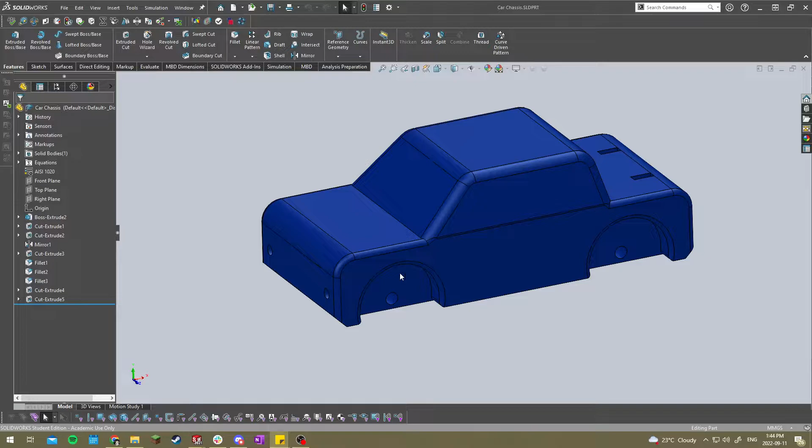In this case, we'll be assembling a toy model car. We have 5 different components here, and I'll show you how to mate each component and put it all together in an assembly. So right here we have the car chassis.

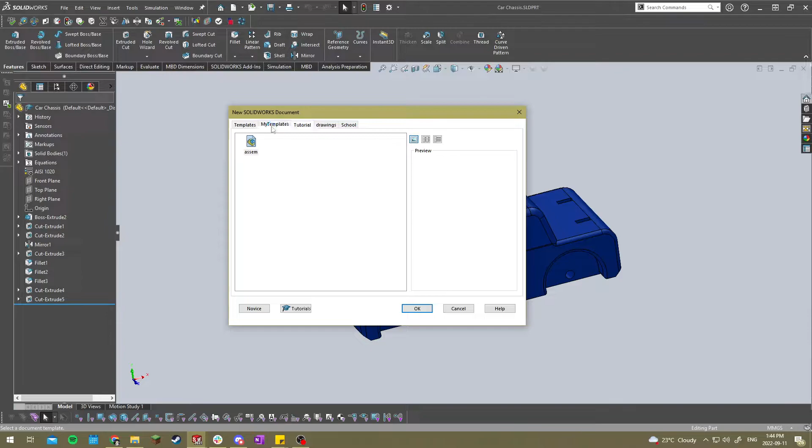If we want to start an assembly, we could go here, click on the drop down, and choose Make Assembly from Part. Click on that, and you have to choose your assembly template. In this case, I have my own that I made, so I'll choose that. And it will let you import the car, or at least the first part.

The other way of doing it is by clicking this New Document button, clicking on the assembly template, and it would repeat that same process. You would go here to browse for whatever file you have, or if it's already open, it would be shown on the left here. So you could do the exact same thing here.

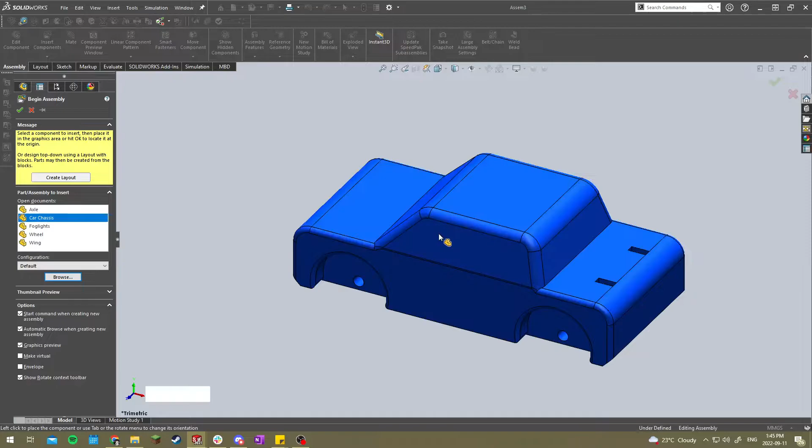When you first import your part, the first part that's imported will usually be fixed. To remove that, you would right click the part, click on Float, and it lets you move it. In this case, this part here, I want to fix it to the origin.

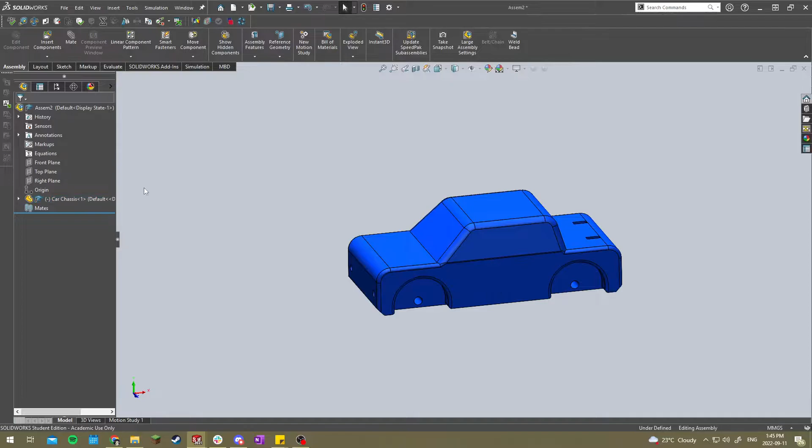So the first thing I could do is mate the planes of the assembly to the planes of the actual part. In SolidWorks, and with most CAD softwares, when you're mating an object you usually need to mate it into 3 different planes, or at least 3 times, to fully fix the item. So I'll show you why now.

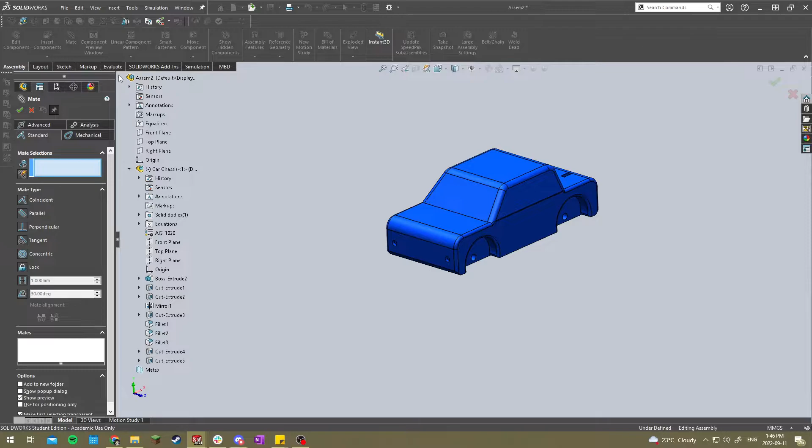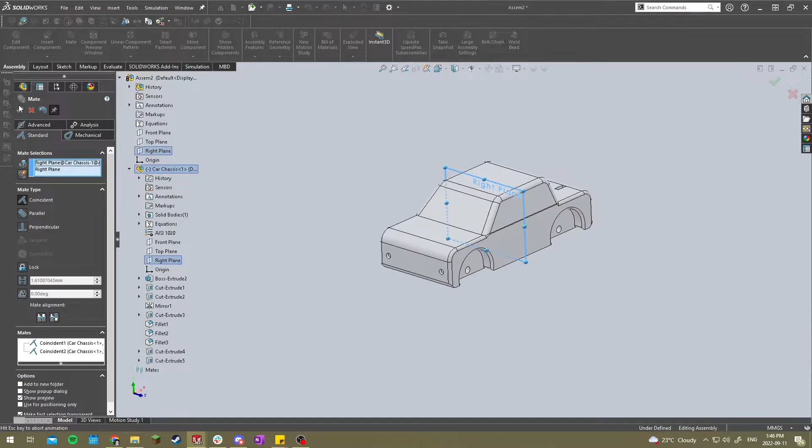If I first mate the 2 front planes, hit the mate tool here, open up your feature tree, click front plane of the part, front plane of the assembly, and mate it. You'll see I could still move the car. If I mate it a second time, top plane with top plane, I still have one other motion of translation. So if you do it a third time, it will just fix it in the 3 planes and you won't be able to move it.

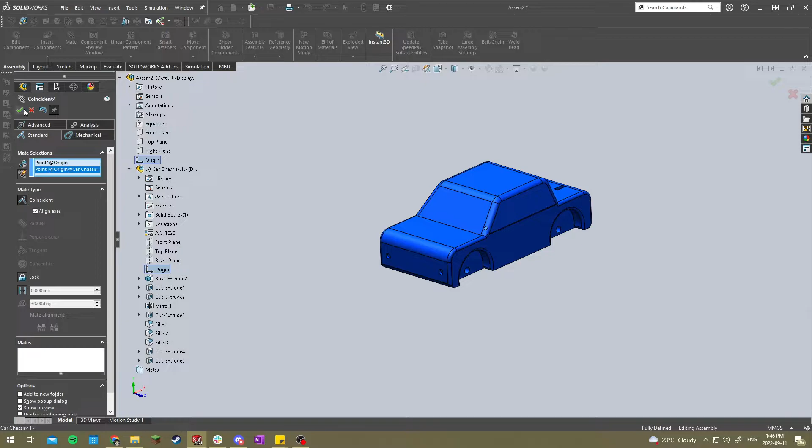There is a faster way of doing this though - I could also just mate the origins together. So if I delete all of these, click mate, click on the origin and this origin, it's going to mate it to the origin and work the exact same way. Once we have the main part mated to the assembly, you can start adding the rest of the components.

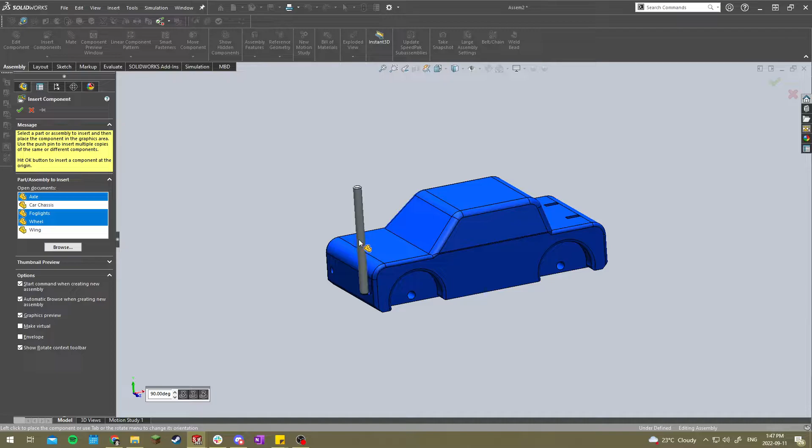There's 2 main ways of doing it. Click on Insert Component and then select the items. You could click control and then click on each one to select multiple - just like this, pulls out multiple items.

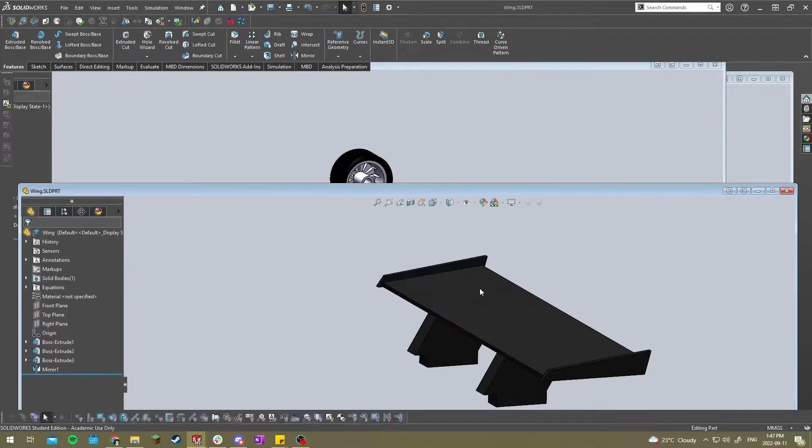Another way is by going to Windows mode and finding the part I want to import. So say I want this wing in the assembly - I could hold control on my keyboard, click on the wing, and pull it into the assembly like that. That's only if you're working with your windows separated, but in this case I don't use it too often - that's just another way of doing it.

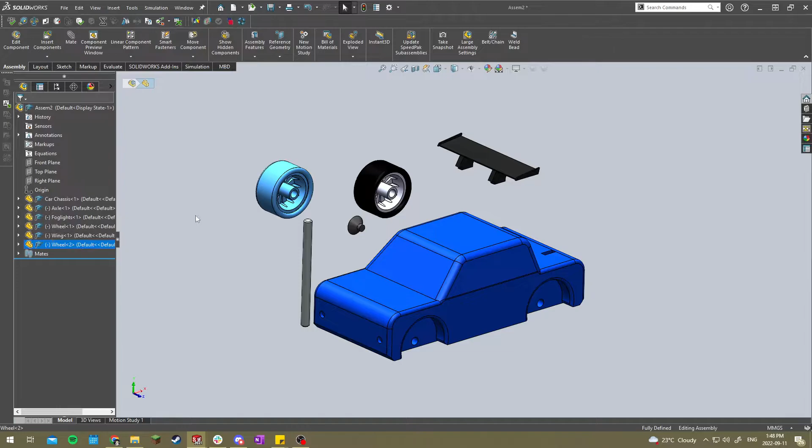If you need to pull multiple of the same items, you could do that by holding control, clicking the object, and pulling it out. In this case, I need 4 wheels, and I could pull out 4 wheels. Another way is to click the item on the feature tree, click Control C, and then Control V to paste it - duplicating all the parts I need.

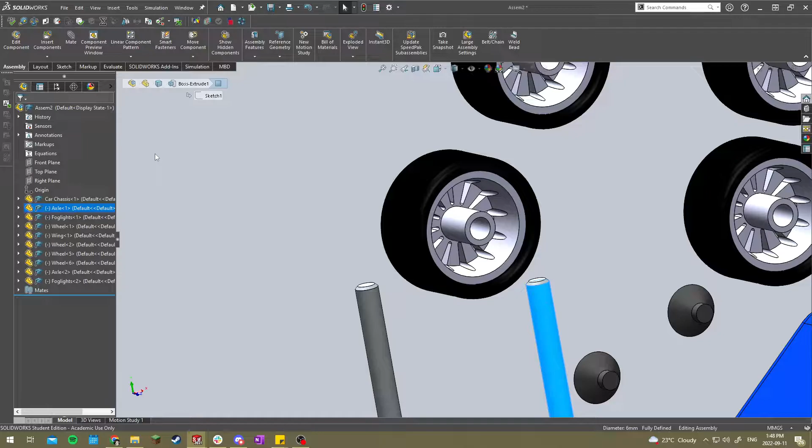That's everything here. The first thing I'll show you is how to mate a cylindrical rod to some type of hole. In this case, I need to fix this axle to the wheel. With cylindrical surfaces, since there's only one surface and not 2, you only need to mate it twice to fully fix it. So this outer circumference will mate into that inner one.

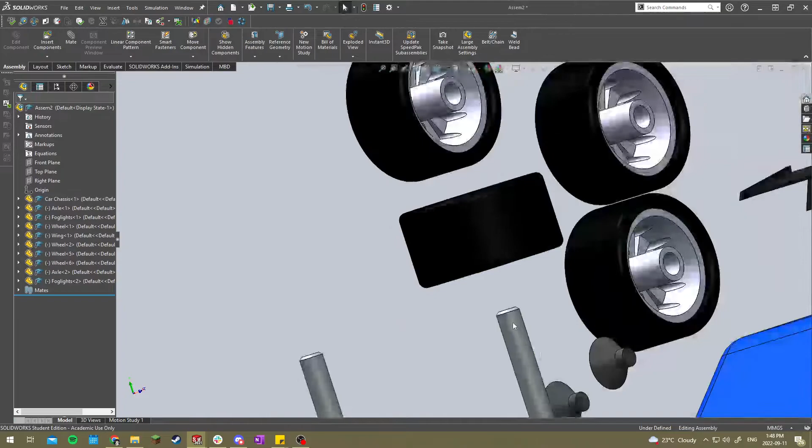So that's one mate, and then I also need to mate the top point here - this flat surface - with the inner flat surface.

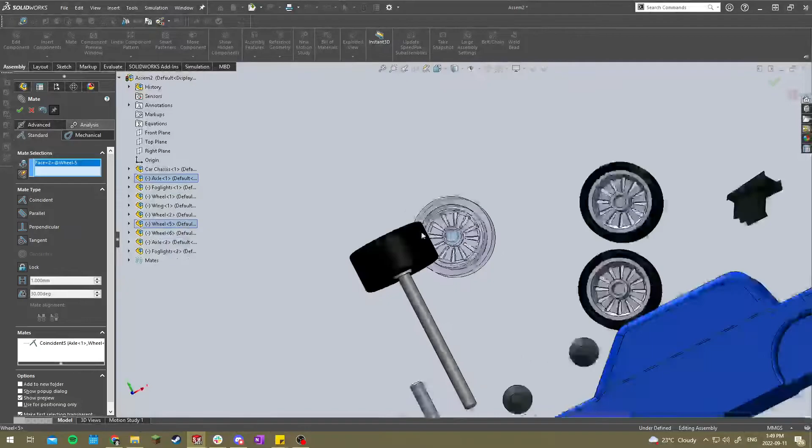And you have a perfectly fixed axle onto a wheel. Basically do that again for the rest of the four wheels. So I'll just do that here.

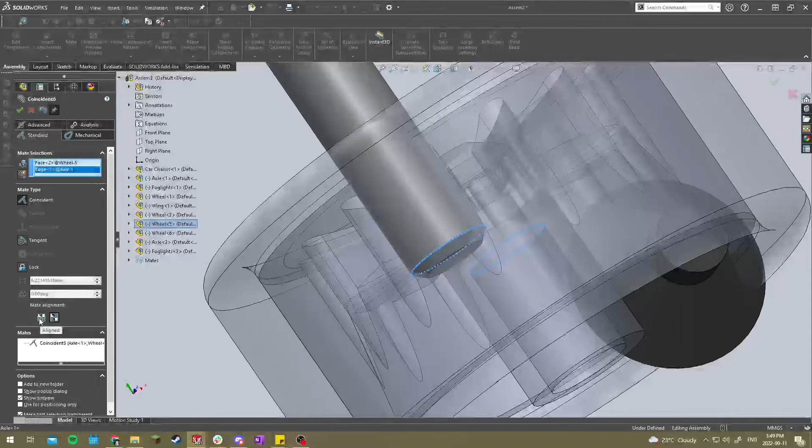If you see here, when I chose this mate, it flipped it. So if that happens again, you could click on mate align here and basically flip the alignment. In this case, I actually just clicked on the wrong feature, but you would just click on mate alignment to flip them.

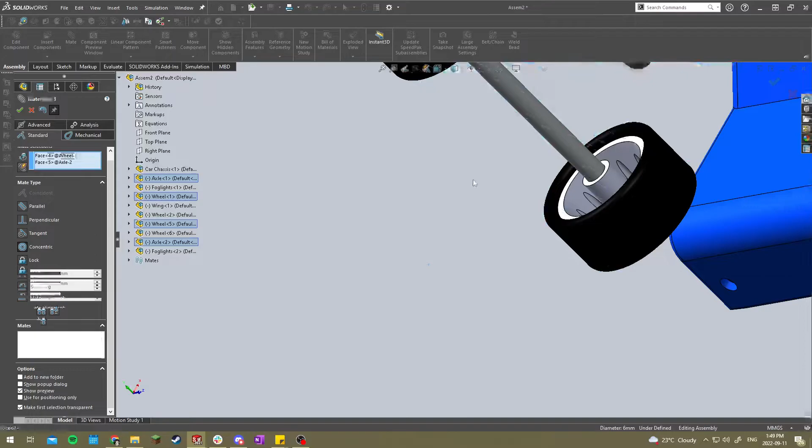With SolidWorks, it basically automatically chooses exactly what type of mate for you, unlike Onshape, so you don't have to worry about what you have to choose.

Now that I have the axles mounted onto the wheels, I want to mount the axle onto the car chassis. So choose the outer circumference of that cylinder, and then click on the inner part of the hole and mate that together. I also need to fix it so it's evenly spaced.

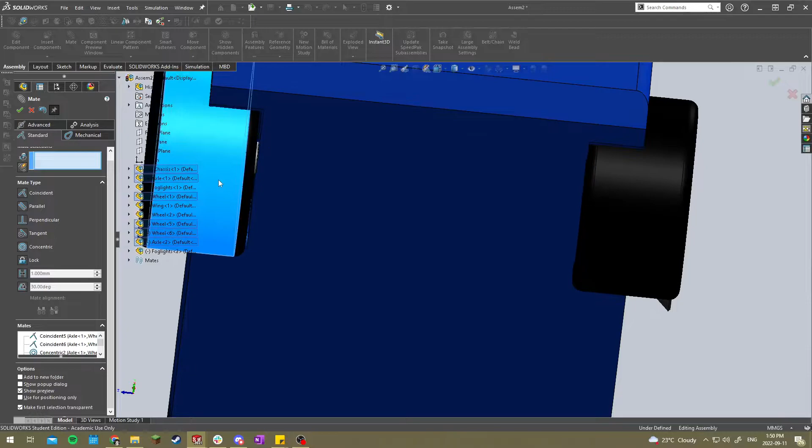In this case, it's designed so that it's a few millimeters apart. If you see here, there's a small gap in between. I don't know the exact size or spacing of these wheels, but I do know the exact spacing of the car chassis.

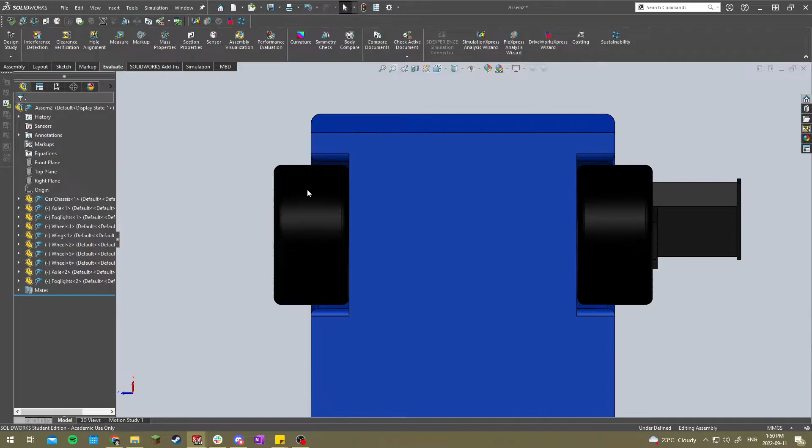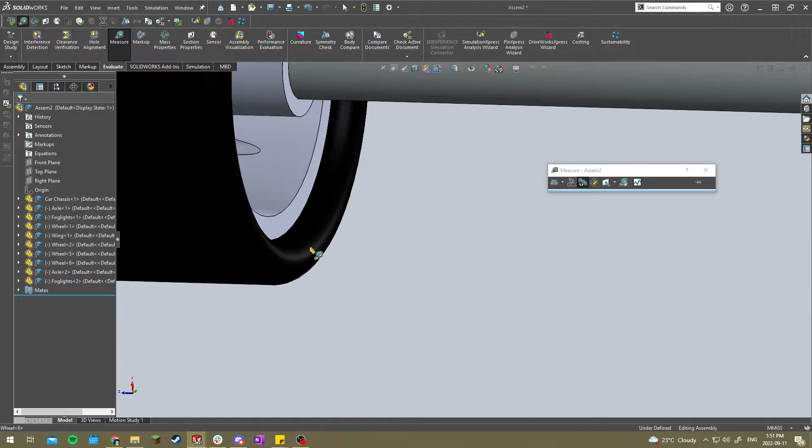You could check this by clicking on Evaluate and going to the Measure tool. From here, if I choose two faces, say this one and this one, I could get the overall distance from the two faces, so 60 millimeters there, and then from this part of the wheel to this part of the wheel, it's going to be 65.

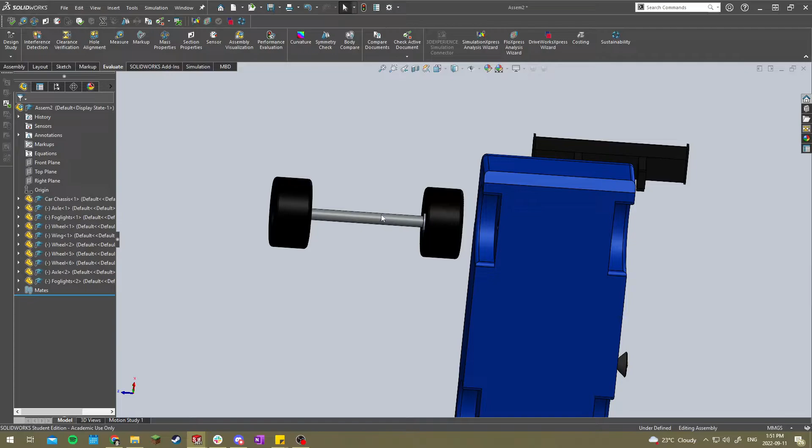So that means that from this point to the side of the chassis, I need to separate it about 2.5 millimeters. To do that with mates, you'd go back to your mate tool, click on this surface, click on this surface, and it will automatically go to coincident.

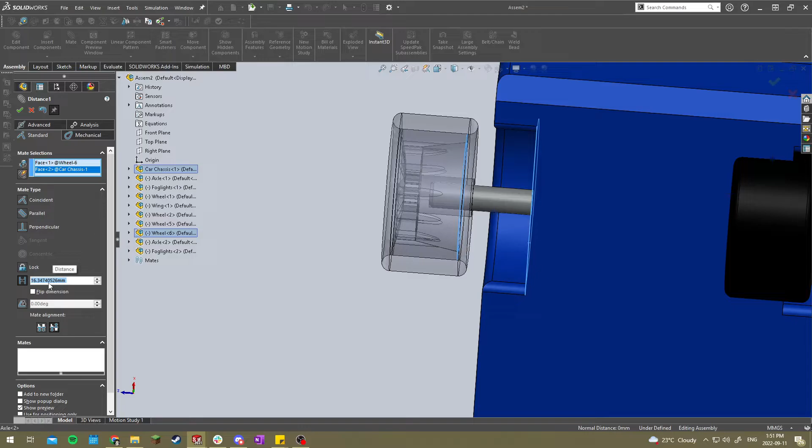In this case, I want to separate it by a distance of 2.5 millimeters. So you could go and click on this distance tool and set it to 2.5 millimeters, and it will automatically do that for you. So 2.5, click yes, and now it's evenly spaced.

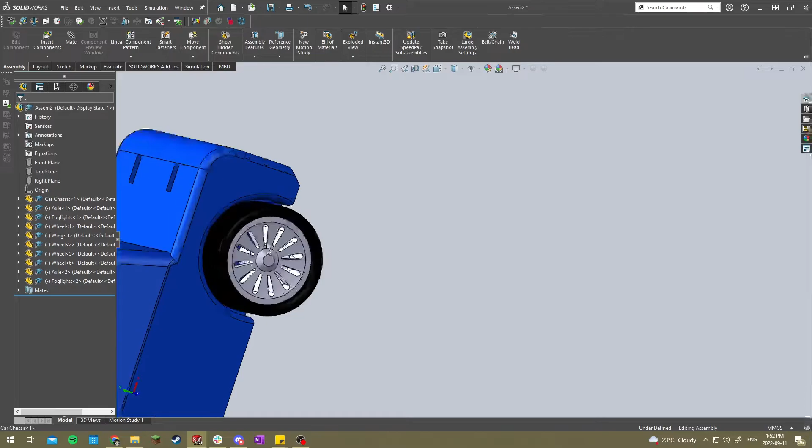And since I only mated the axle once with a concentric mate, it should still freely spin. We'll do the same thing for the other one.

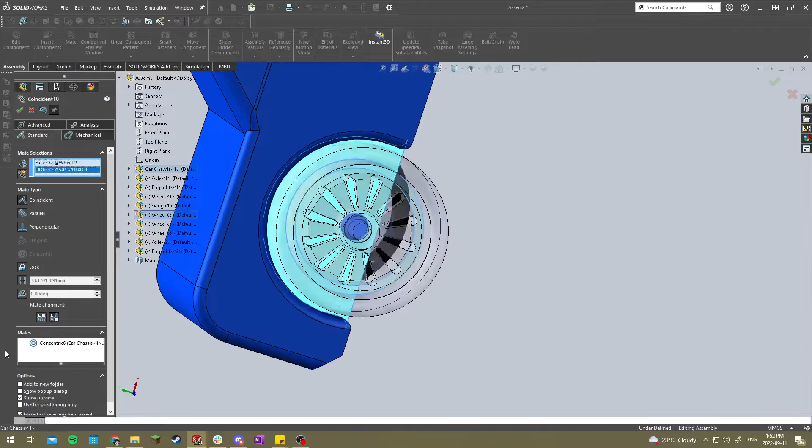In this case, if you see here, it's kind of opposite, so you just click flip dimensions, and it would fix it.

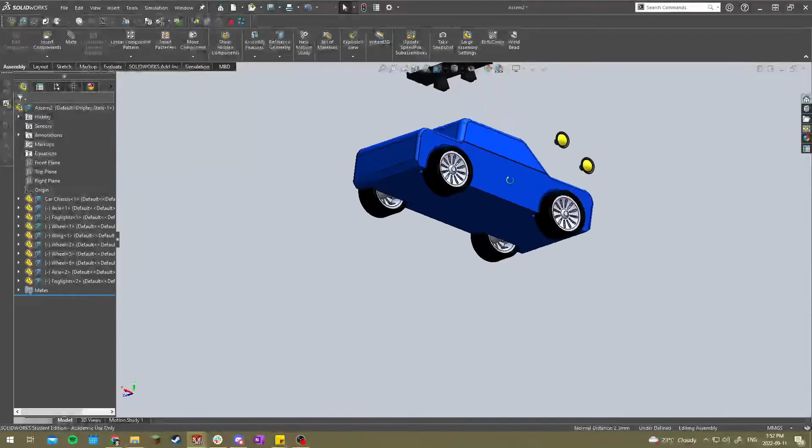All right, now we have the wheels on the chassis. It's looking pretty good, but we do have two other add-ons to the car, a nice wing here, and also fog lights. Let's add the wing first.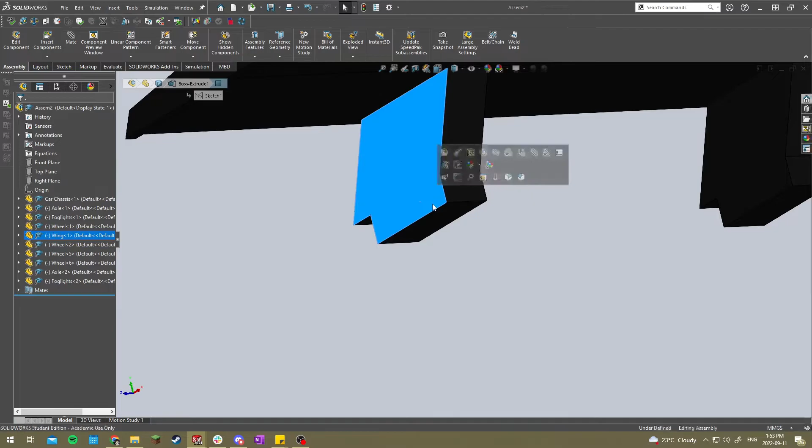In this case, you would need to mate this 3 times since there's three different axes, or at least 3 planes on this piece here. First, mate that part with the bottom of this insert, then mate the side here with this side, and then finally mate this back piece so that it could fully fix itself onto the car chassis.

And there you go, you have the spoiler on the car. It's looking pretty nice so far. Last part is just to mate the fog lights.

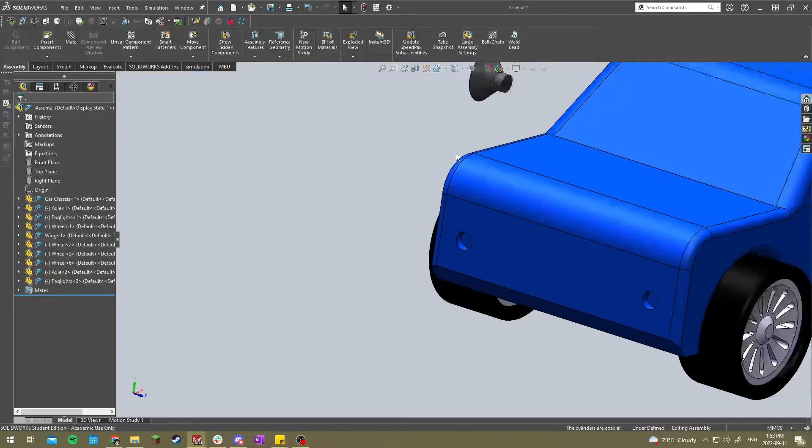In this case, it only needs 2 mates, one concentric and then one coincident. In this case, I have to move these a bit or else it's going to go through the car.

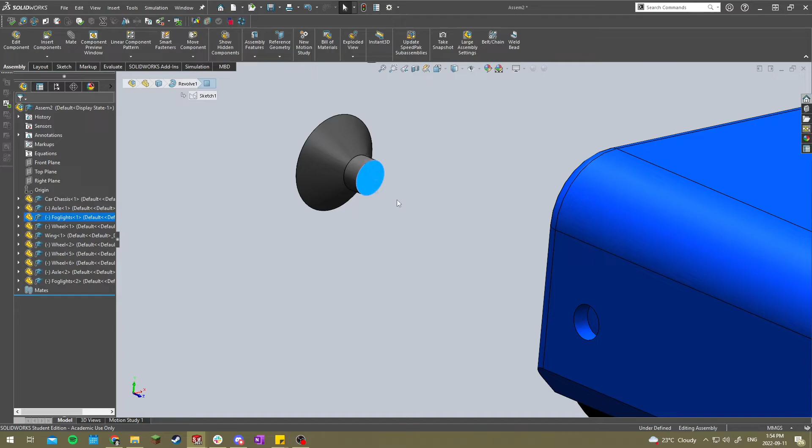Let's just choose this inner part, choose this rear part. It's a little fidgety, but what I like to do is grab the parts first. Select the faces first, so select that one, hold control, select the second one, and then click on mate, and it will automatically mate.

And then the next one will be the concentric one. Now we have one of the two fog lights on.

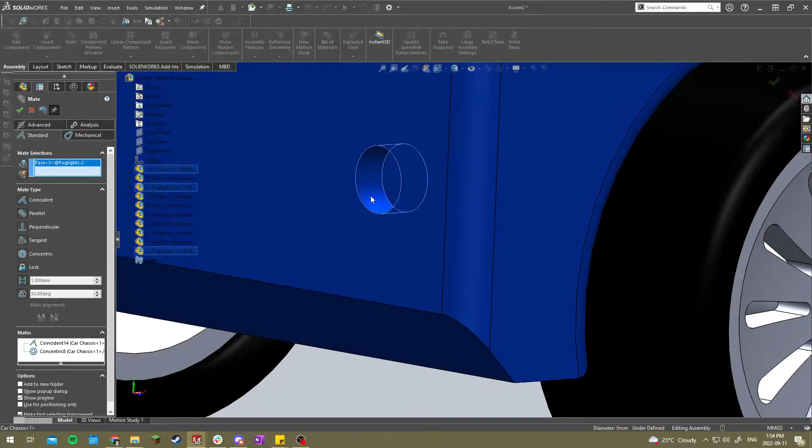Now for the last one, this one is flipped, so let's flip it back. And then the final mate here.

And here we are. Now we have a fully assembled toy car. It has all of its little features, fog lights, wheels, axles, and the spoiler.